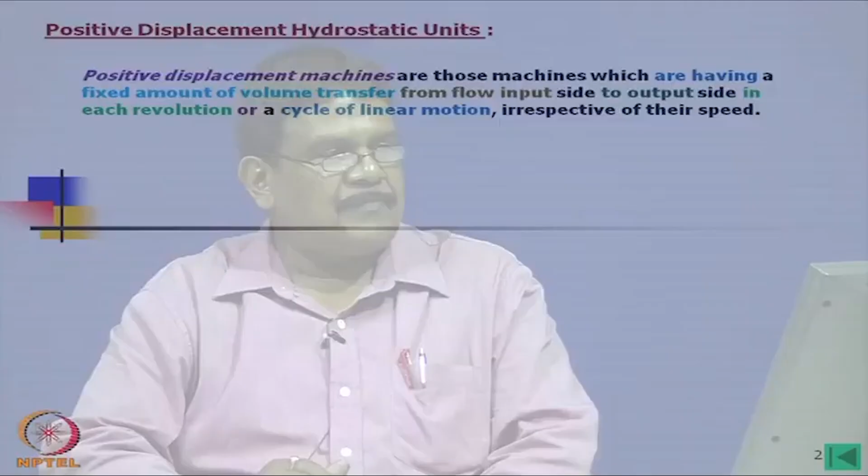Positive displacement machines are those machines which have a fixed amount of volume transfer from input side to output side in each revolution or cycle of linear motion, irrespective of their speed. This means whatever the geometric displacement, the same amount will be transferred from input to output side, whether it be a rotary machine or a linear actuator, considering there is no leakage.

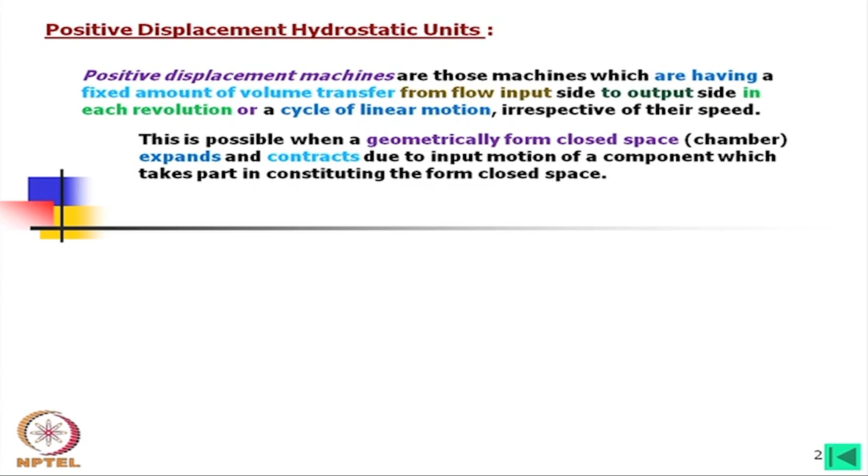This is possible when a geometrically formed closed space chamber expands and contracts due to input motion of a component which takes part in constituting the formed closed space. For example, consider a cylindrical piston within an enclosed cylinder system, say a tube well. When the piston moves, the geometrically cylindrical volume expands or contracts. This is called a positive displacement reciprocating pump.

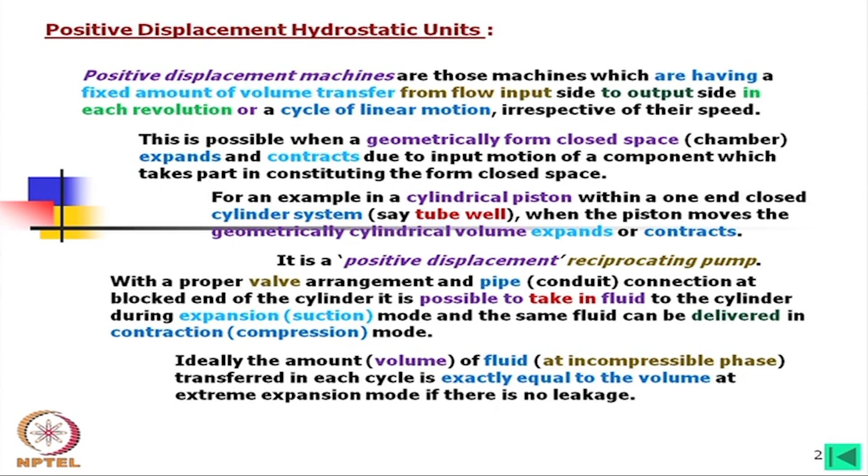With a proper valve arrangement and pipe conduit connection at the blocked end of the cylinder, it is possible to take in fluid during expansion, which is suction mode, and deliver the same fluid during contraction or compression mode. Ideally, the volume of incompressible fluid transferred in each cycle is exactly equal to the volume at extreme expansion mode if there is no leakage. This volume is called swept volume.

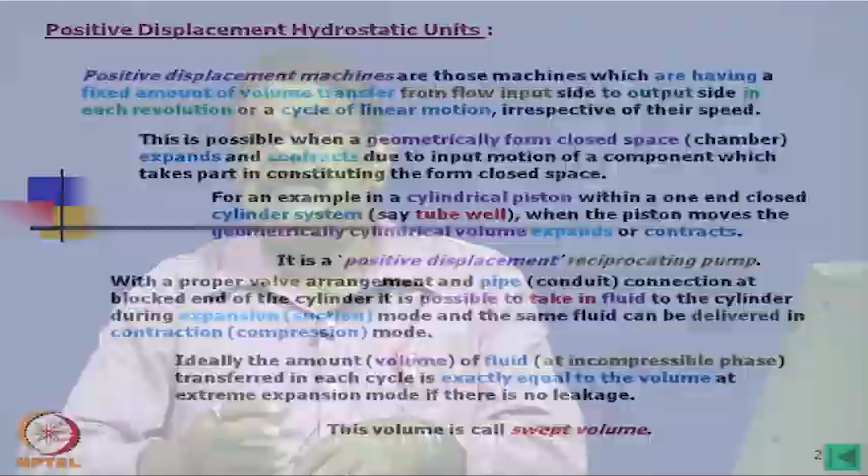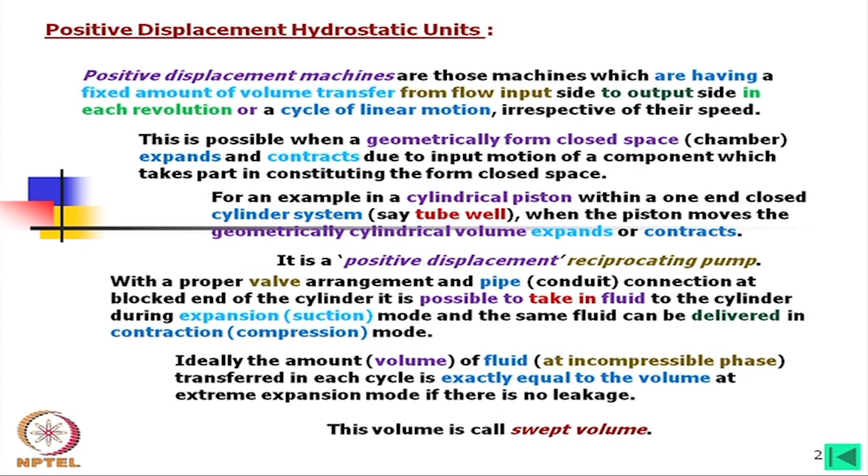But in case of positive displacement machines, the volume is taken in, then it is cut off. The whole volume is then pushed out at the output side, and usually there is no suction head for a positive displacement pump. However, depending on the machine, it may have a low suction head. The pressure at outlet depends on the pressure head at that side due to the load it is handling.

It has no relation to the kinematics of the pistons. This means if there is no pressure or it is not transmitting any load, only pumping the volume, you may find there is no pressure on the oil, except it has to overcome some resistance, so there will be some pressure. So pressure is experienced. If I consider a pump, it is not pumping the pressure, it is pumping the fluid, and pressure is being experienced.

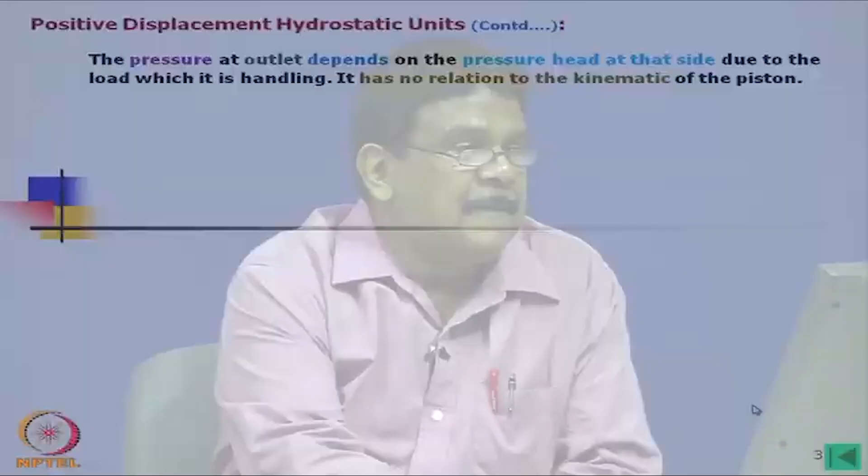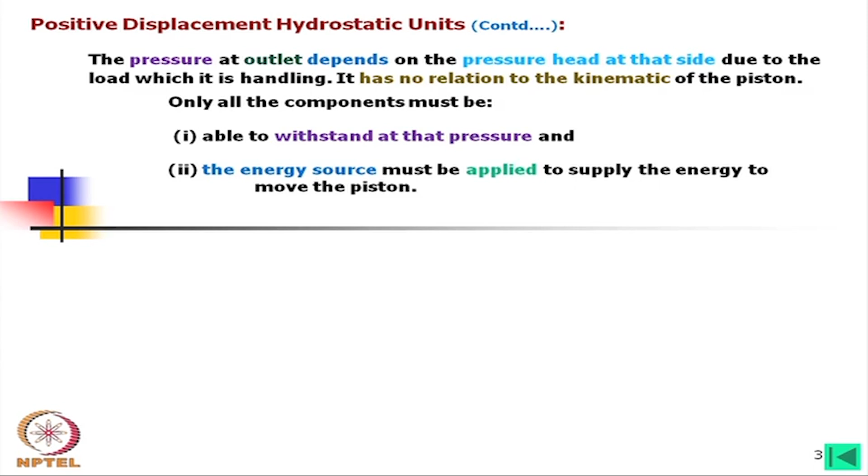Now, we are talking mostly in this lecture about incompressible fluid, that is mostly the hydraulic units. As it is not pumping the pressure, pressure is experienced at the outlet, so all components must be able to withstand that pressure, they should be able to take the loads, and the energy source must be applied to supply the energy to move the pistons. This means if there is pressure outside, the energy must be sufficient to generate that much pressure.

In such energy transfer, there is no hydrodynamic or hydrokinetic effect. That is why such a pump is called a hydrostatic pump. In fact, we should call it a hydrostatic unit, since it might be a pump or it might be a motor.

The machine with the reverse process, a linear actuator like a lifting jack, is called a positive displacement reciprocating motor. We can have either linear or rotary units. There is also another term used, called rotating. In one case, rotary means the position of the piston and cylinder is fixed, and only a cam is rotating which actuates the pistons. But there is also a rotary piston arrangement where the whole piston unit itself rotates. We will come to that later.

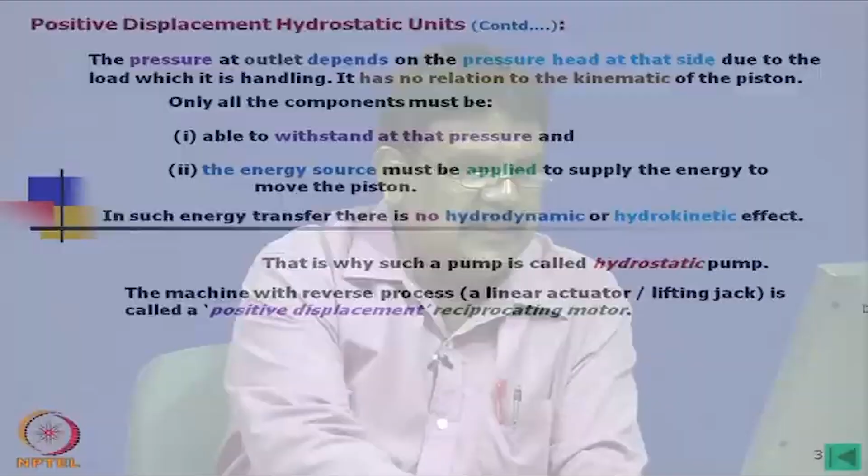Obviously it is also a hydrostatic unit, meaning a linear actuator or reciprocating motor like a hydraulic jack should specifically be called a hydrostatic unit, a linear motor or linear actuator.

For transforming more energy in a compact space, rotary units have evolved from the basic concept of reciprocating units. For example, in a tube well there is only one cylinder, so it is reciprocating. Now, if we put a few cylinders together and actuate them with the help of a cam with a time phase, then we mix up the output and can develop rotary machines. In fact, the rotary machines are like that.

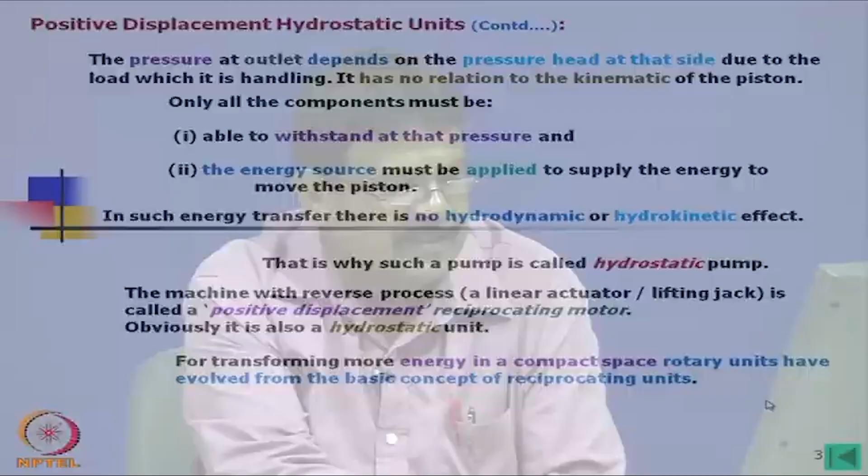They are of various types as discussed in the next sections. From the construction point of view, a pump and a motor from a particular variety look alike, only with a minor difference in valve systems. It is very difficult to identify whether it is a motor or pump.

In case of a pump, we rotate the shaft and oil is taken in at the suction stage and delivered at the compression stage. In case of a motor, it is reversed: high pressure oil is pumped in and then output is taken through the shaft. Otherwise, it is very difficult to understand which is pump or motor. It is indicated there, so from there we can consider this is pump and this is motor.

If we think of these components, there is a valve. If we change that valve, the same unit can again be used as a motor. Even with a specially designed valve, a unit can be used both as a pump and a motor. When we learned about the symbols, there is a symbol for a unit which is used as a pump and motor, but we should keep in mind, if we design the valve to act both as a pump and motor, we have to sacrifice some finer activities of the valve. In that way you will find such pumps or motors normally have lower efficiency, but still it can be used.

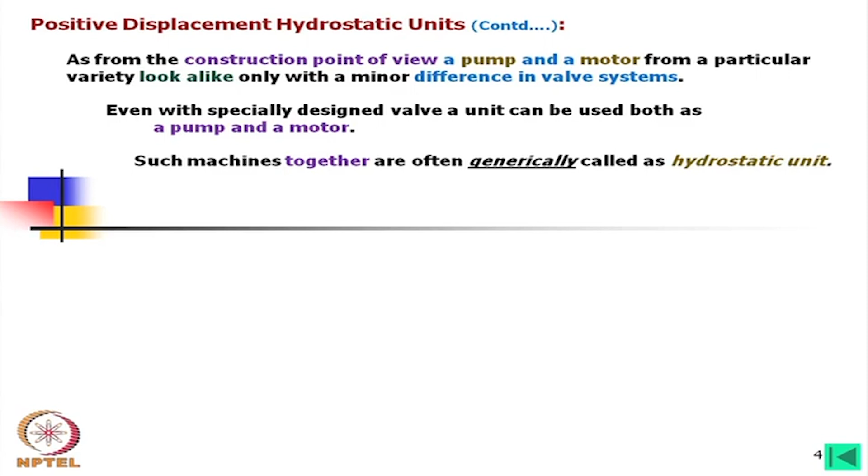Such machines together are often generically called a hydrostatic unit. Many people are not much accustomed with that term. Suppose even within mechanical engineers, if you say that this is a hydrostatic unit, these people will always ask whether it is a pump or motor. They will never accept that it is a hydrostatic unit. Hydrostatic unit means this can be used as pump and motor, just by changing the valve.

But if you think of the centrifugal pump, of course that can be used as a turbine, but it is difficult. You have to change so many things there.

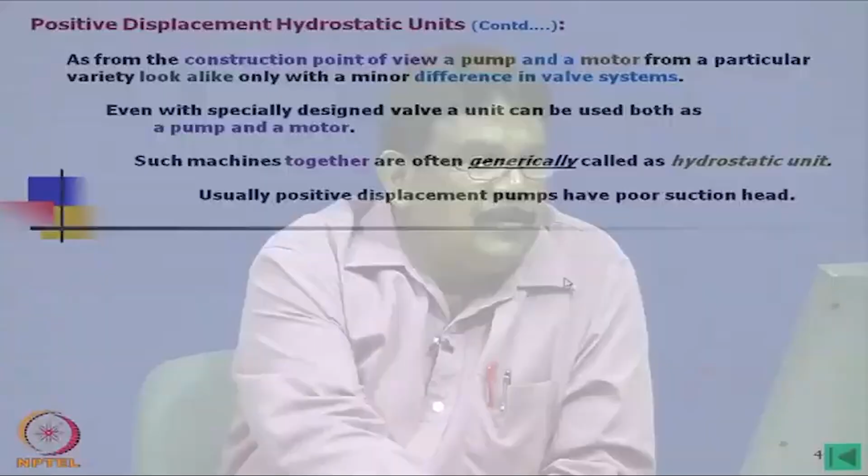Usually positive displacement pumps have poor suction head, which I have mentioned. We do not need even suction head in many cases. Usually for the purpose for which we use the hydrostatic unit, we can put the pump even submerged inside the oil. However, a small suction head, in terms of height, maybe 1 meter suction head may not be a problem. Even for very good performance of hydrostatic units, sometimes a charge pump is used. We will come to this later when we learn about the hydrostatic system.

Now, it is to be noted that such units, particularly oil hydraulic units, have higher power output to unit weight. I have explained this, but I would like to specifically mention that the ratio of torque output divided by moment of inertia is high compared to other systems such as electrical, water hydraulics, IC engines, etc.

In electrical machines, which are comparable to oil hydraulic machines, flux density has a limiting value for a given core size. That means, if we measure the flux density of the motor core compared with its weight, we will find it has some saturation. We cannot make it very small to have very high flux density.

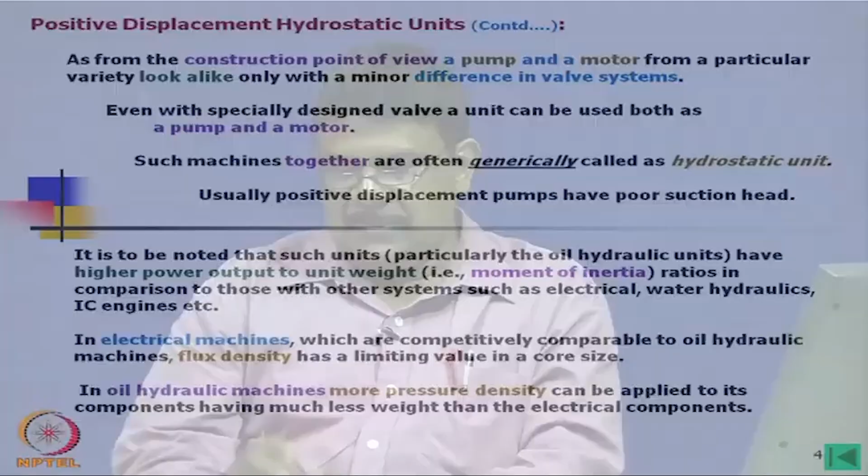In oil hydraulic machines, more pressure density can be applied to its components, having much less weight than the electrical components. This is the advantage: the fluid inside generates equal pressure in all directions, so the load is distributed on the body, which is usually a ferrous component. If the load is distributed that way, it can take much more load, more stress. That is why we can go for a smaller size.

In hydrokinetic machines like centrifugal pumps, torque converters, and fluid couplings, the rotor gives velocity to the fluid inside it, and a negative pressure or suction head is created at the inlet. I have explained this difference already.

In case of positive displacement pumps, the entrapped volume is pushed out at high pressure, which has no physical connection with the inlet fluid, as I have already told you. Therefore, no suction head or a much lower suction head is created at the inlet. We can specially arrange the machine to create a suction head, but it is of no meaning, it is not required.

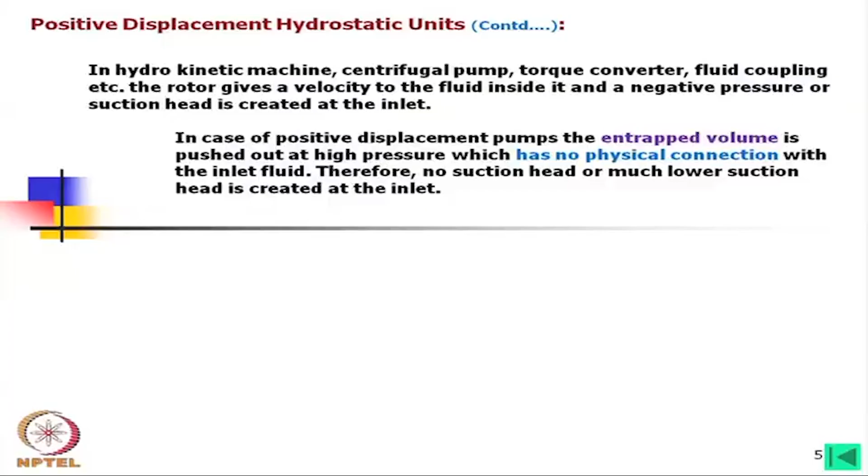Various principles have been adopted to construct rotary hydrostatic units, pumps and motors. In this lecture we shall discuss rotary pumps and motors, and look into the various types of such motors and units.

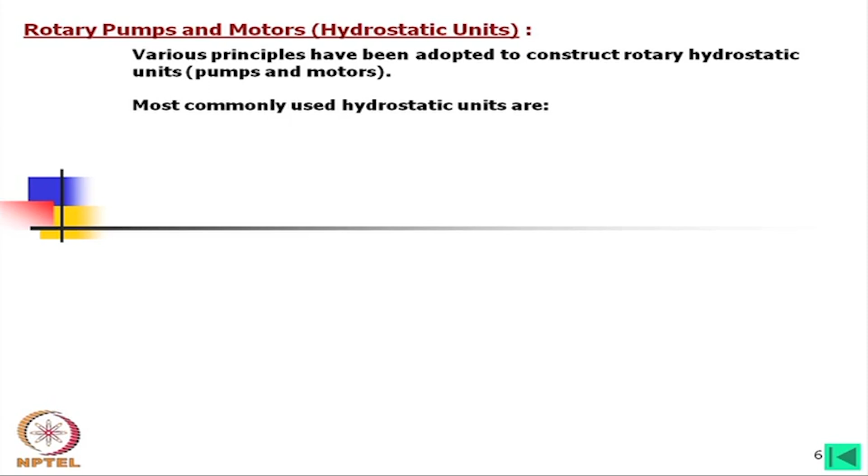Most commonly used hydrostatic units are the gear type, vane type, and cylindrical reciprocating type. These three are most common, and these are rotary machines, usually not reciprocating machines. They possess different leakage characteristics, valve systems and other features.

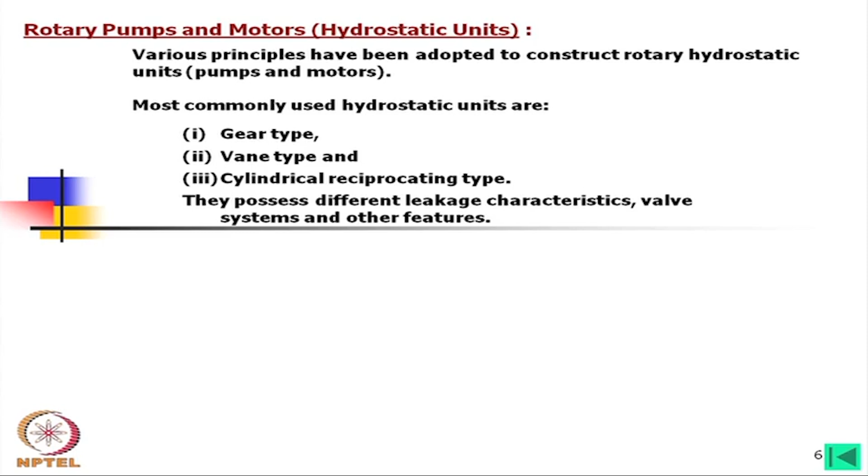Some of them can be made of variable displacement. Cost differs with variation in performance. However, depending on applications, they are selected considering various optimization characteristics. For example, gear pumps will have more leakage, and we cannot optimize that leakage characteristic. In comparison, the best will be the cylindrical reciprocating type, whereas vane type will be in between.

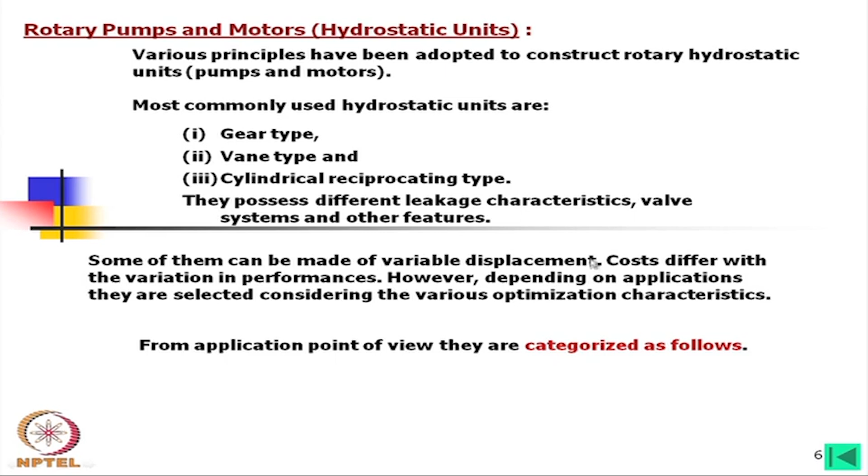From an application point of view, they are categorized as follows: gear type, normally for low pressure, 0.7 megapascal to 18 megapascal. We would not normally use hydrostatic units for such low pressures, but it can perform at such low pressure also.

The vane type covers 3.5 megapascal to 21 megapascal. Why 3.5? You may ask, will this work at 0.7 megapascal or even less? The answer is yes, obviously, but when we would like a pressure range of 3.5 to 21 megapascal, we would look for vane type.

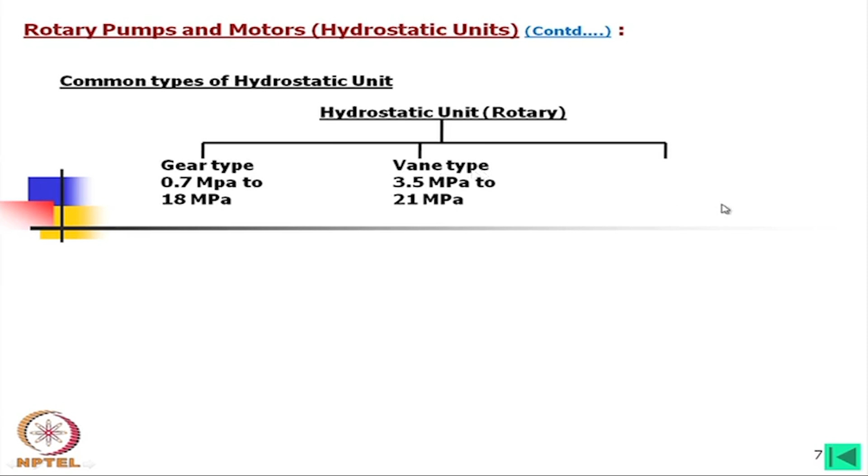Now, in piston type, we have axial piston, which can be used up to 21 megapascal, and there are radial pistons also, which can be used up to 70 megapascal. These are all general purpose; we can have more pressure, particularly with axial pistons, we can go for higher pressures.

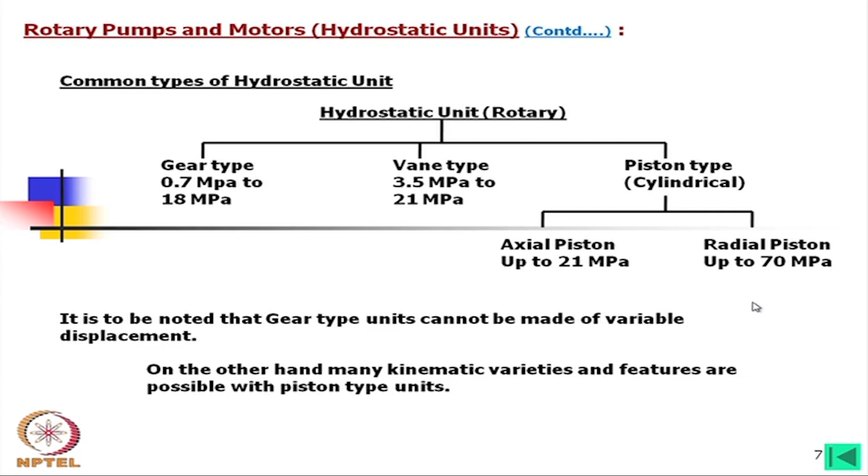Very carefully designed gear pumps nowadays can give even 20, 21 megapascals or more, and vane type also can give higher pressure. It is to be noted that gear type units cannot be made of variable displacement, whereas vane type can be made variable displacement, and obviously piston type, both axial and radial, can be made variable displacement. Many kinematic varieties and features are possible with piston type units.

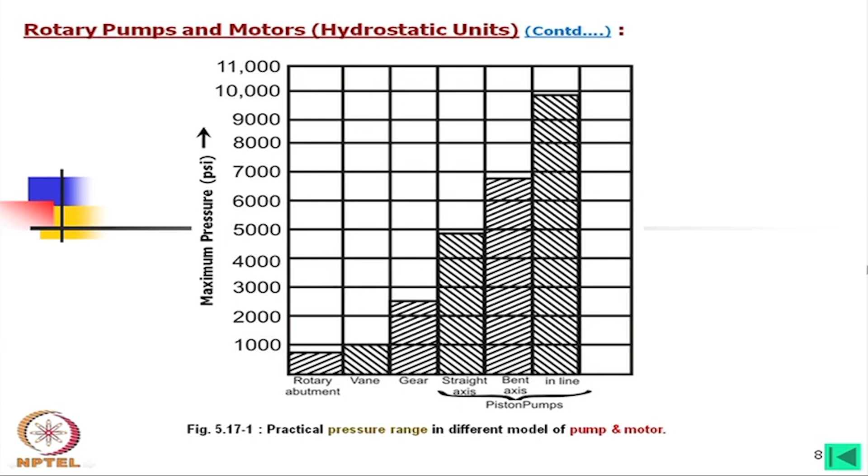In a reciprocating single piston cylinder with uniform shaft crank rotation, the rate of output flow is sinusoidal. In multi-piston machines, flows are mixed. Here I would like to mention that as flows are mixed, we call it DC, direct current - we can compare it with DC type machines.

It is also possible to make alternating flow hydraulic machines. However, this is not popular due to valving problems, and it is not much beneficial if we do not want to separate the fluid - for the same fluid it is not much benefited. That is why we do not go for AC. However, we need not consider any alternating flow hydraulics at present. We should call all of these DC flow machines.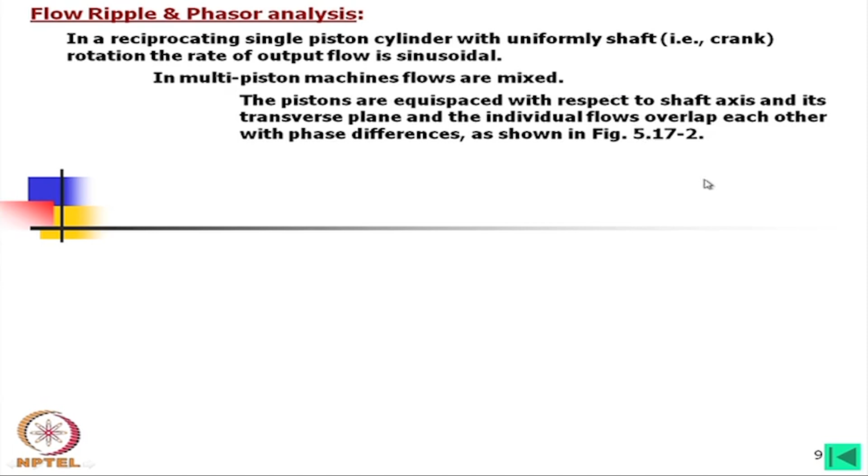The resultant flow ripple reduces with the increase in number of pistons. What is resultant flow ripple? This one is called resultant flow, as we are mixing the flow, for a single piston we are getting a flow like this.

Suppose you are rotating a crank shaft with single pistons, you will find half cycle it is delivering the oil and half cycle it is suction, it is not delivering. But when you are mixing multiple pistons, although each piston has half cycle delivery and half cycle suction, when one piston is in suction mode, another few pistons are in compression mode and delivering oil. So the ultimate flow ripple we get looks like this.

That means, if the shaft is rotating at a constant speed, we will find that flow is fluctuating. With the increase in number of pistons, that fluctuation reduces. So we cannot go for a very small number of pistons, and there is another interesting factor we will come to now.

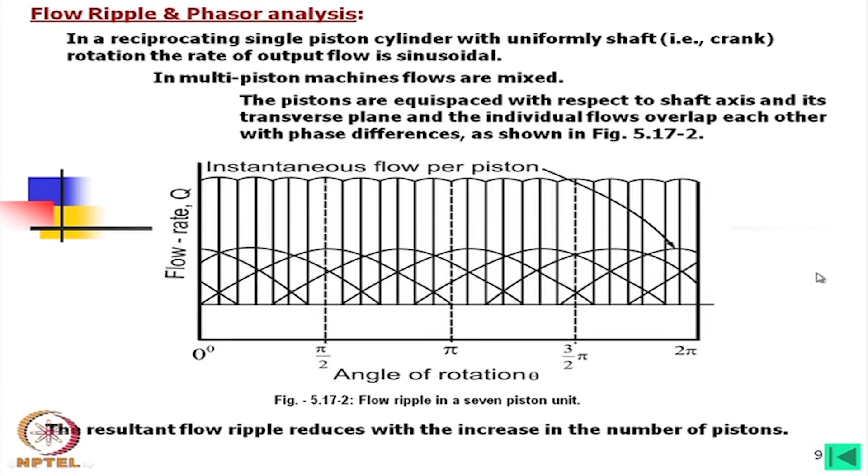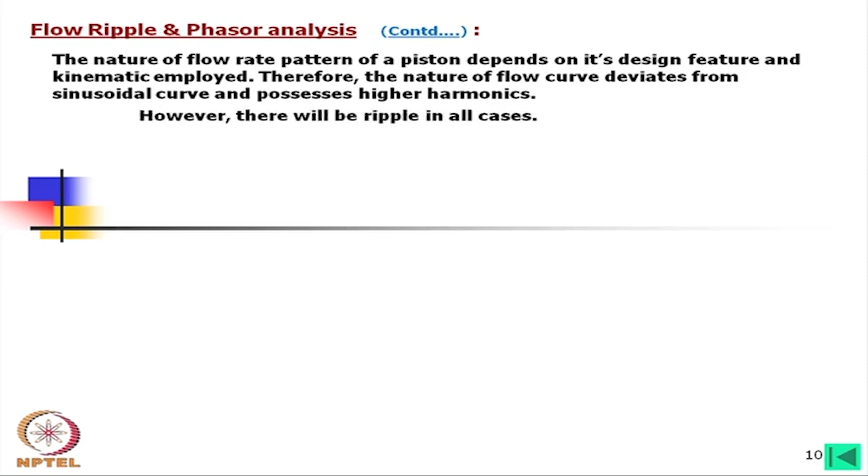The nature of the flow rate pattern of a piston depends on its design feature and kinematics employed. Therefore, the nature of the flow curve deviates from a sinusoidal curve and possesses higher harmonics, which I have explained. However, there will be ripple in all cases, whatever harmonics are there, there will be ripple.

It is to be noted that in common hydrostatic pumps, pistons are single acting, and only half the cycle remains connected to the delivery side. You should know this double acting concept.

For example, in many cases you will find that if you take a linear actuator with a rod at both sides for equal volume displacement, while it is going to the right side, the left side is suction, accepting oil or allowing oil to take in, whereas the right side is delivering the oil. When it moves to the left side, it is vice versa.

We can have a special valve in the suction side and a special valve in the delivery side, and in that case, although there is a single cylinder, we should call it double acting, not single acting. But whatever rotary machines you find with pistons, normally they are single acting, not double acting, only one side. So each piston has half cycle delivery and half cycle suction.

Only because they are being mixed, when one is in suction mode, others are in delivery mode, and that is why there is continuous delivery. Now, we can say this is a cycle, say for the delivery side we have drawn this cycle.

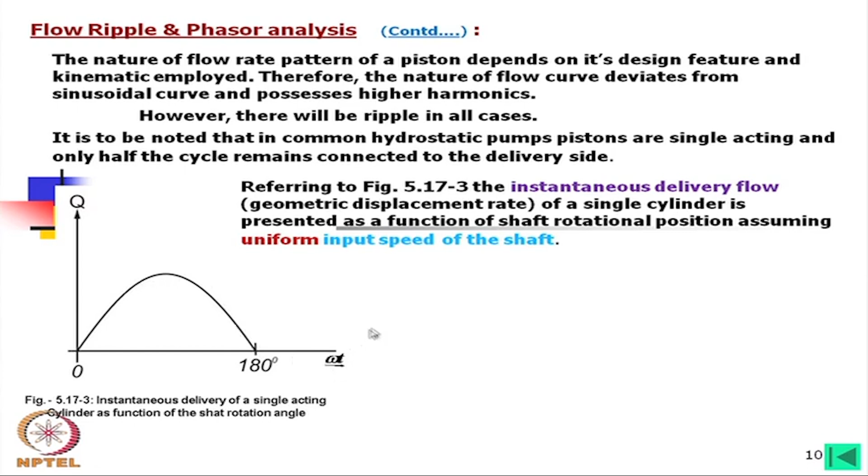Referring to this figure, instantaneous delivery flow, the geometric displacement rate of a single piston, is presented as a function of shaft rotational position, assuming uniform input speed of the shaft. So this is presented with respect to that uniform speed, omega is constant. If it is not constant, this nature will change, that is obvious.

A polygon can be built using the phasor. What is a phasor? This is used in electrical analysis. You can consider a phase, say R is the arm, then amplitude you can calculate as R sin theta, and at any instant you can say that this is the amount of delivery. So this is called a phasor.

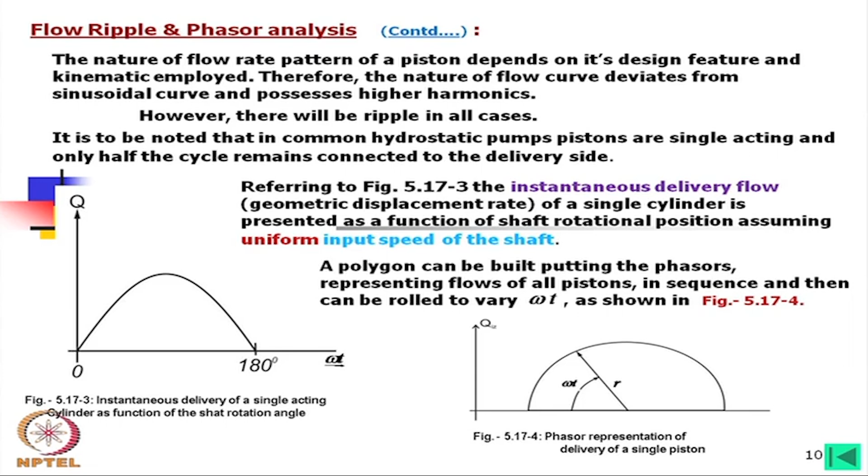Now, for all the pistons, if we draw their phasors together, we will get a polygon. Overall maximum flow Q max and minimum flow Q min can be realized from the phasor diagram. It is like that, say...

We have 5 pistons. So what we can do with this phasor: say this is with respect to the shaft, this is the first piston position. The second piston obviously will be here, because this angle difference will be, say if this is 0 plus omega t, then this will be 0 plus 2 pi divided by 5, since we have 5 pistons, plus omega t. So in that way if we put all the phasors together, you will find this polygon, and this height is the maximum height which represents the maximum flow.

This is analogous to the flow. That means, in the flow ripple, the higher point can be found by this, and the lowest point will be this one. If I rotate this on this line, this point will generate a curve, a small curve, and then the next point will generate the other curve.

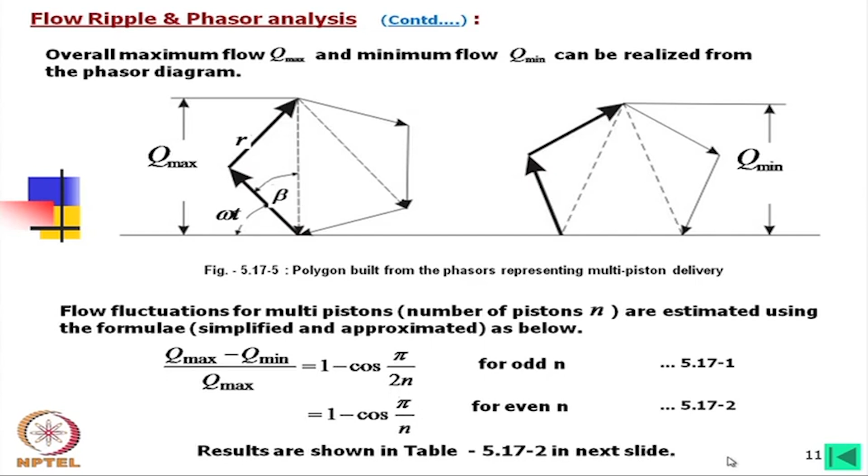And 1 minus cos pi by 2n is for odd number of n, and for even number of n it is 1 minus cos pi by n, where n is the number of pistons. Now, this can be plotted for different cylinders, multiple cylinders, and we have presented this in this table.

Now, if I consider 1 piston, then q min is 0 in the flow ripple, it will be 0 definitely. So this will be 100% fluctuation. That means, if you consider the sinusoidal curve, it will go from the top to bottom at the 0 line. So this is 100%, and if we look into this formula, this is quite interesting, that for 2 pistons also it is 100%.

Now, when we use 3 pistons, using the formula with n equal to 3, you will find this is 13.6, only 13% fluctuation. If you go for 4 cylinders, it is again increasing. You can visualize this.

In case of odd numbers, they are lagging after one another in such a way that, say for 5, 3 pistons are in delivery when 2 are in suction, or even for 3, 2 in delivery, 1 in suction, or vice versa. In case of 4 pistons, there is a situation of 2 in delivery, 2 in suction. So that is not advantageous.

For 5 pistons, you see this is reduced to 4.9, about 5%, and for 6 you get again 13.4, which is the same as for 3 pistons. The same fluctuation we will have for the odd number 3 pistons and the even number 3 into 2, 6 pistons. That means, if you get any even number, you will find that if you divide by 2, you get an odd number, the same fluctuation will be there.

If you divide an even number and get another even number, then again you have to divide. In that way you can find out, except that if you divide 4 by 2, then 2 pistons do not have the same 27.3 value, it instead has 100% fluctuation. Otherwise, for example, 8 is having 7.6, and if you divide it to get 4, it is having 27.3. So, you will find these are different, but all on the higher side, whereas if you go for 10 pistons and 5 pistons, they have the same value, because 10 divided by 2 is 5.

Now, in that way, if we arrive at 11 pistons, you will find the fluctuation is only 1%. So next, if we go for 13 pistons, you will find this is less than 0.5%. This means that if you use 13 pistons, we would say there is almost no fluctuation, and it is better to use 13-piston machines.

Why not always go for 13 pistons? You should always remember, with the increase in number of pistons, the cost will increase. Valve porting will be a problem, second issue. Thirdly, in terms of reliability, when they start to show a little error, the dynamics will increase in case of more number of pistons.

After a certain time, you will find all the pistons and cylinders are not of the same size. Within the tolerance zone, they are different. Now, when they are worn out, if there are more pistons, the dynamics will increase. So, in that way, you will normally find the number of multiple pistons is not less than 5, and not more than 13. However, 5, 7 and 9 are very common, mostly 7, as 7 is a very good number for the number of pistons, giving only 2.5% fluctuation, and considering leakage, it is slightly on the higher side.

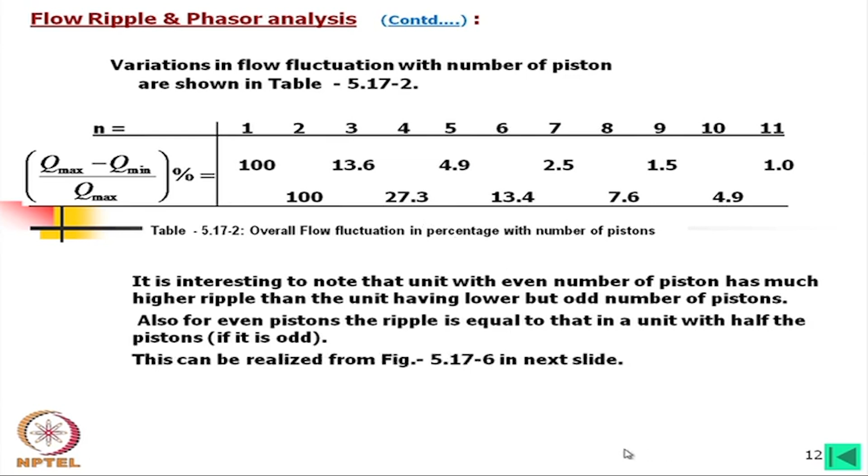Also, for even pistons, the ripple is equal to that in a unit with half the pistons if it is odd, not for even. As I told, 8 divided by 2 does not give the same fluctuations. This can be realized from another figure.

Now here I have shown what we have done. Say this is of 5 pistons, and this is another 5 pistons. If I consider this of the same phasor, I have drawn the 10 piston phasors like this and 5 pistons. Now, as the length of these arms are the same, this means we have used the same pistons and same stroke for constructing a 10 piston machine. Obviously, for the same rotation, the delivery will be double.

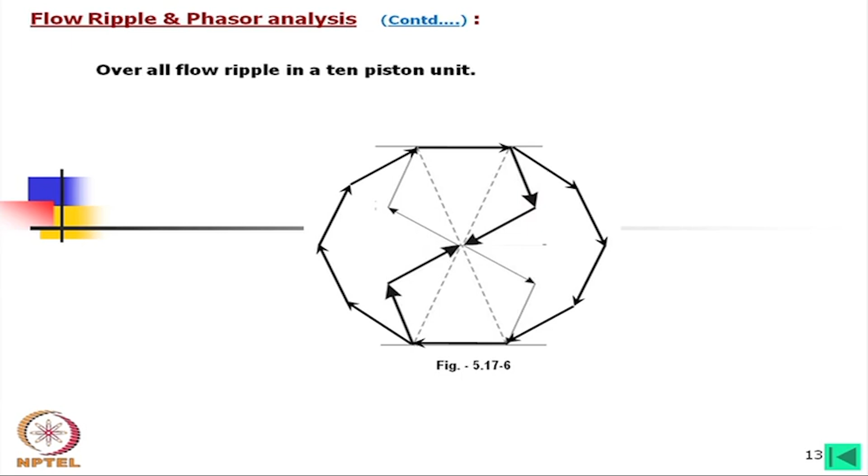Now, to make the delivery equal, we have to reduce the size to half stroke. But if you look at the nature, you see this is showing the 5 piston minimum flow, mixed flow minimum at this height, and maximum will be this one diagonally. So when it becomes straight vertical, this line will become vertical, but in case of 10 also you are finding just double of that. In case of the minimum one, it is just double of that. That means we get the same nature, only multiplied by 2, and if we divide by 2 for the 10 piston stroke length, it gives the same nature. Just with this phasor diagram we can realize this.

Now we are considering ripple with an example - this is what we have shown, an axial piston pump. How it works we will come into in detail later, but let me explain a little. This is called a barrel - just a cylindrical body of this much thickness, with holes. How many holes depends on how many pistons we are using. You can see here we have used 7 pistons, so there are 7 equispaced holes on which the pistons are placed.

Now this plate is called the swash plate. This can be made fixed, or it can be made variable in angular displacement - that means this alpha can be varied. In case of a variable pump or motor, this can be varied. In case of fixed, we keep this alpha fixed. This is the tilting angle of the swash plate.

Now let us consider this piston, say the top one here. While it is rotating like this, it is coming to this side and again going up. So while it is rotating clockwise from this side, this point is going beyond the screen and rotating like this. Gradually this piston is coming out and the stroke is increasing. That means total stroke can be taken from this point to this point - if I draw a straight line, this is the total stroke. So one side is suction, the other side is delivery.

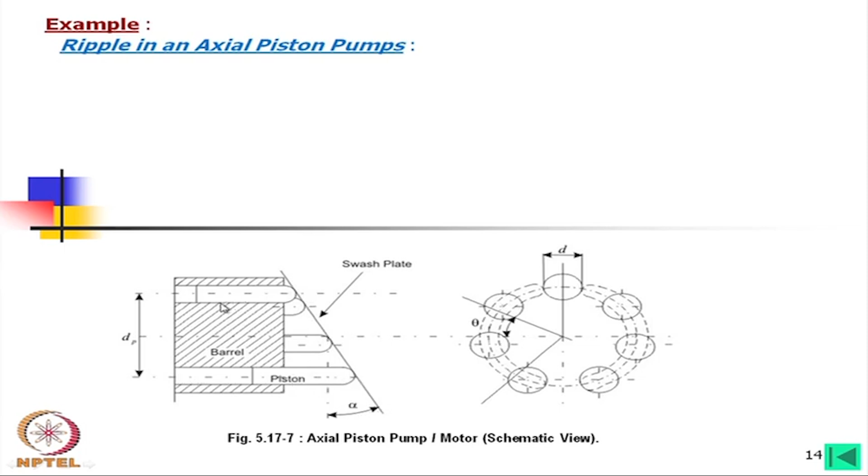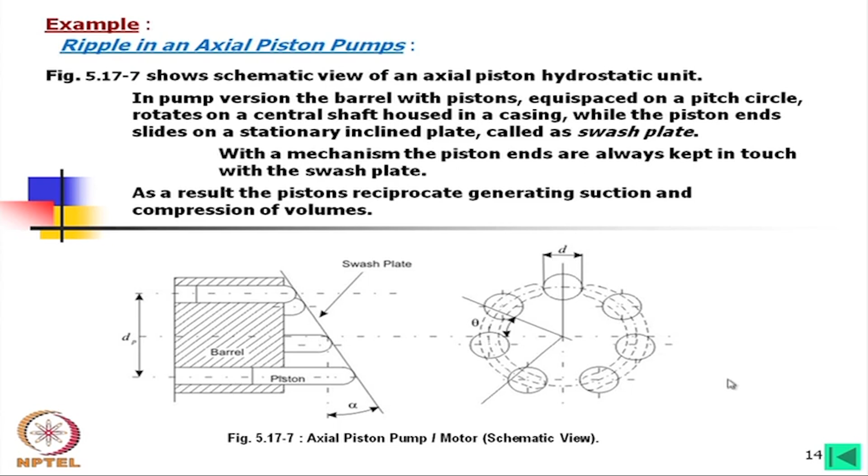Now in the pump version, the barrel, as I explained, is equispaced on a pitch circle, with a central housing shaft through which the piston ends slide on a stationary inclined plate. There is an arrangement so that the piston always touches the swash plate. As a result, the piston reciprocates, generating suction and compression volumes.

Now the instantaneous volume of a piston can be written as pi d square by 4, which is the area of this piston, a single piston, and dP is their pitch circle diameter. dP tan alpha is the stroke length. Now this stroke length varies with shaft rotation. What we have to do is imagine this height, then this is a sine theta - that is the displacement volume.

You can do this exercise on your own and find the instantaneous position of this piston. If we plot this, we get the flow curve, which is called a sine curve, because this part is fixed when alpha is fixed, and this is also a fixed part.

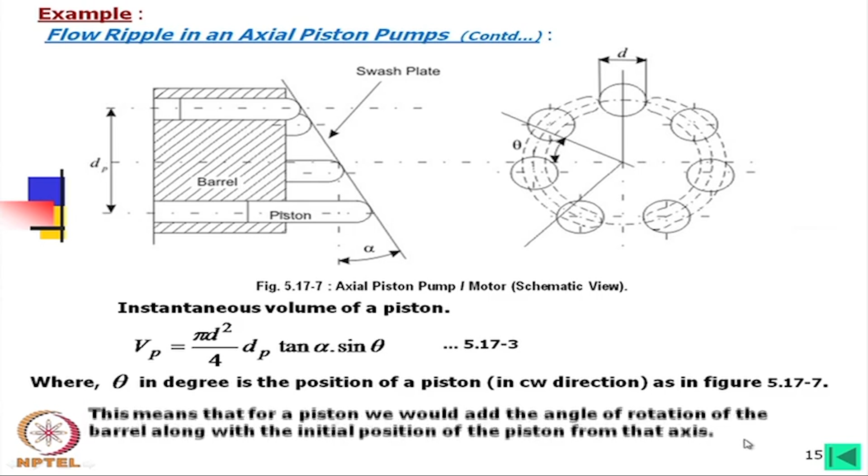Now theta in degrees is the position of a piston, considered in the clockwise direction. So from the zero position, this piston has rotated this much, and we have multiplied it with sin theta. For this piston, how much should we take? Theta plus 2 pi divided by the number of pistons, as written here. This means for a piston we add the angle of rotation of the barrel along with the initial position of the piston from that axis. This is very simple.

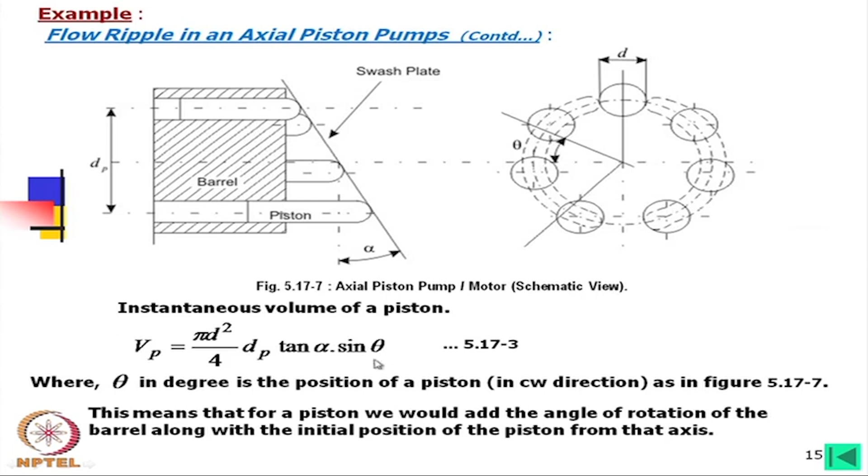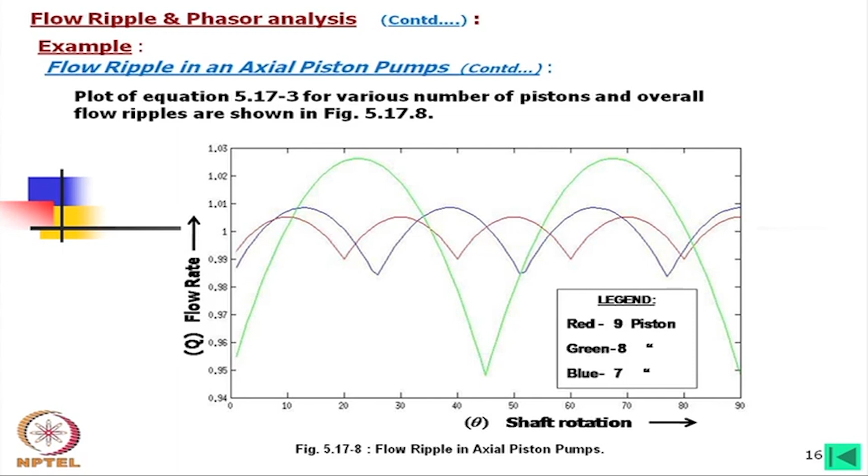So in that way, what we have understood is that by phasor analysis we can find out, in general form, what will be the flow ripple in rotary piston pumps. And for that, I would say the reference is the same hydrostatic transmission system book by Korn.

We can follow this, particularly if we would like to know more about the phasor diagram, because I have not seen this anywhere except in that book, by Professor Jean Thoma, who was also one of the pioneers who used bond graphs in fluid power. He is a man from Switzerland. Fortunately, he came here to IIT Kanpur, and I have met him. In his book you will find that phasor analysis, but the formulation part is not given.

You can try it on your own, but you won't arrive at those exact equations. You will only get some equation close to that. You have to neglect the parts which have less contribution.

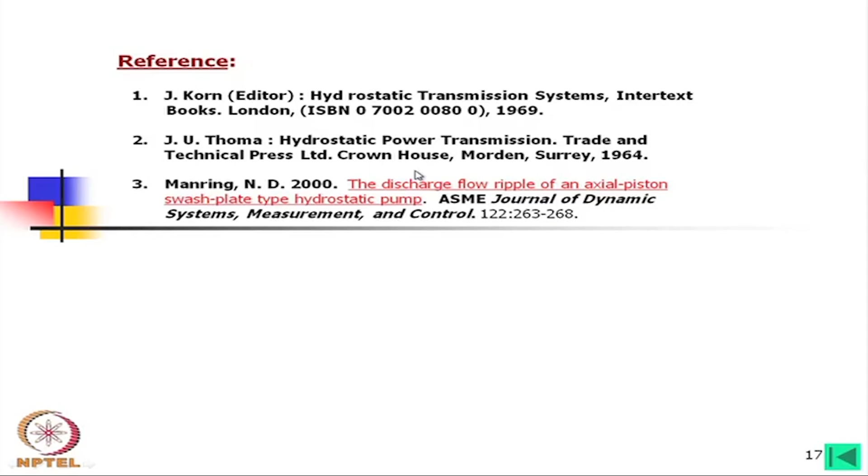Now I suggest you should also read the papers on pump motor design by Manring. There are many other people, but Manring, in recent times, in the last 10 years, has published many papers. So particularly if you would like to know more about the inline piston pumps which I have shown in this figure, you can search online, click on Manring's name, and you will find that this paper is available there, still online. If you click his name you will find a list of papers, and clicking on this particular paper will get you the paper. You can read it. Thank you.